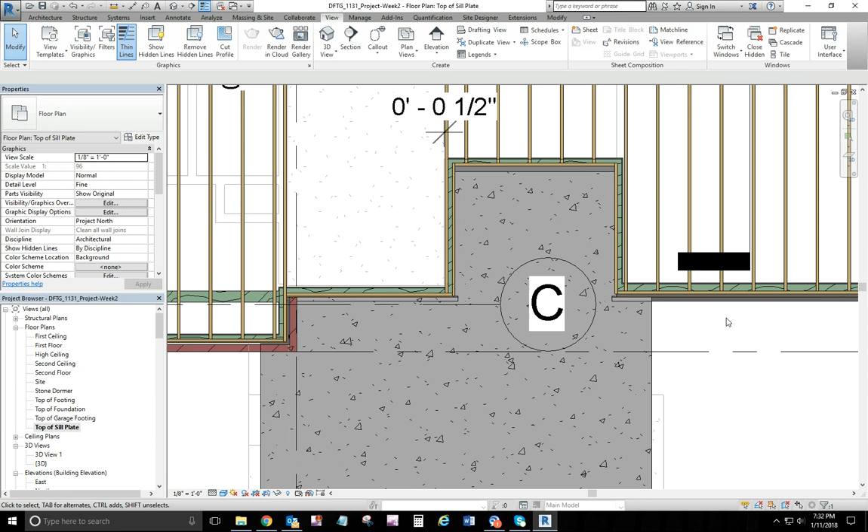So let's fix this problem first. Let's go to a section view through there, and you can see this sill plate. The sill plates are specified as a 3.5 inch sill plate. We actually have 6 inches of space there. So in actuality, they would pull that back in or cut some filler to put in there. But what let's do is let's take this and align it to the outside edge.

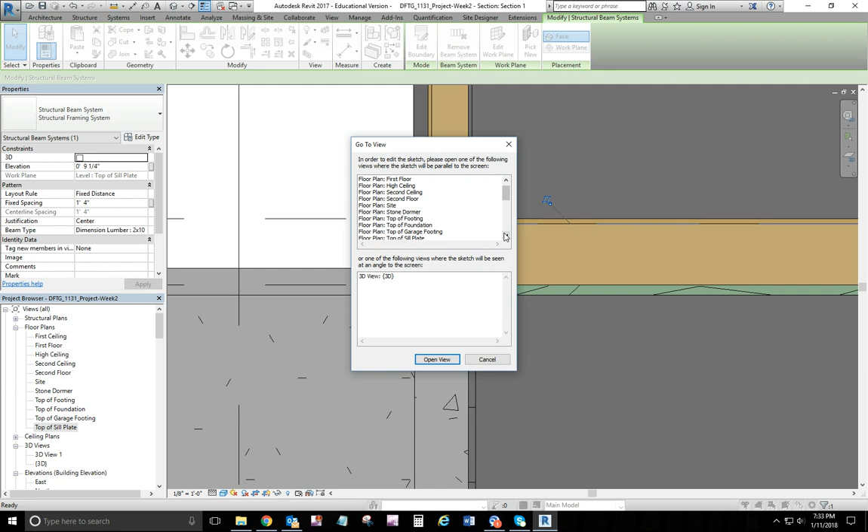And that may... we'll see how that adjusts us. Now we're going to have to go back in and edit our boundary on that, and we did that on the top of sill plate layer. So I want to move that down to... okay, we'll try align.

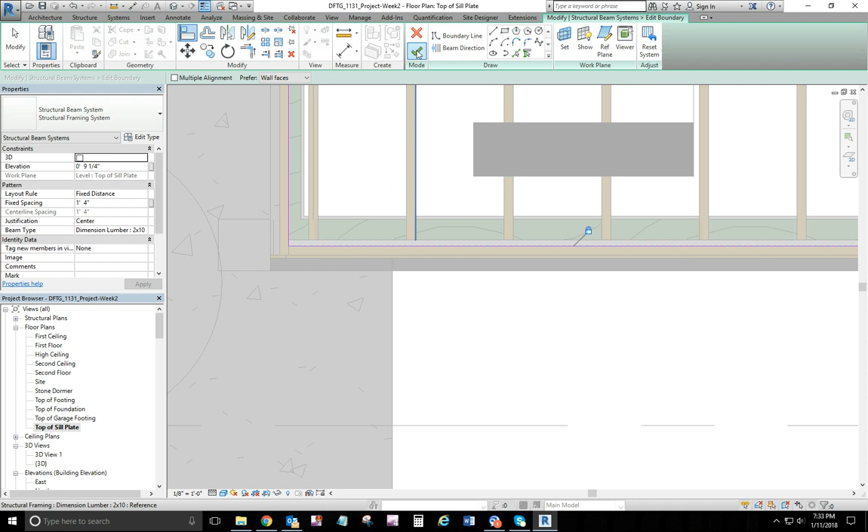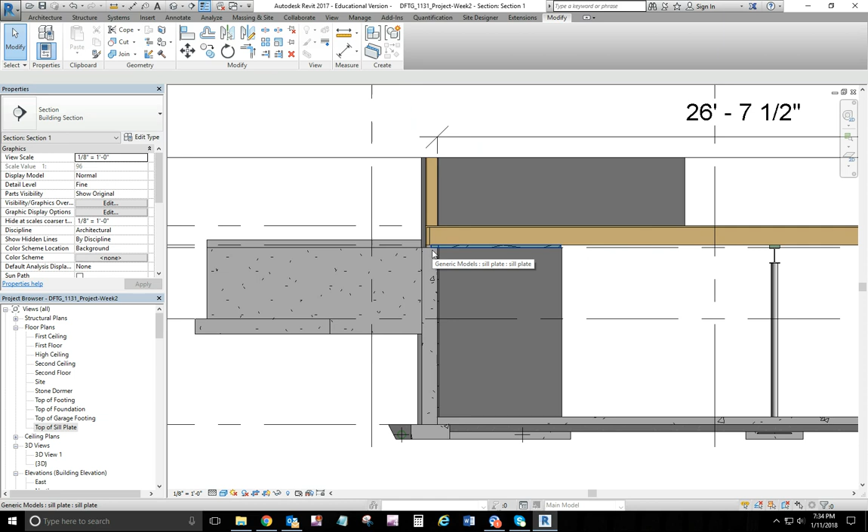Okay, so that fixed that problem, I think. Yeah, okay, so that fixed that. Our subfloor was correct to start with because it went out to the wall itself. It's just one of those weird details that when you're recreating somebody else's project, you're going to run into things like this that you don't quite fully understand. So in actuality, that would be a larger sill plate. Okay, I've double checked these dimensions, and dimension wise, everything's okay.

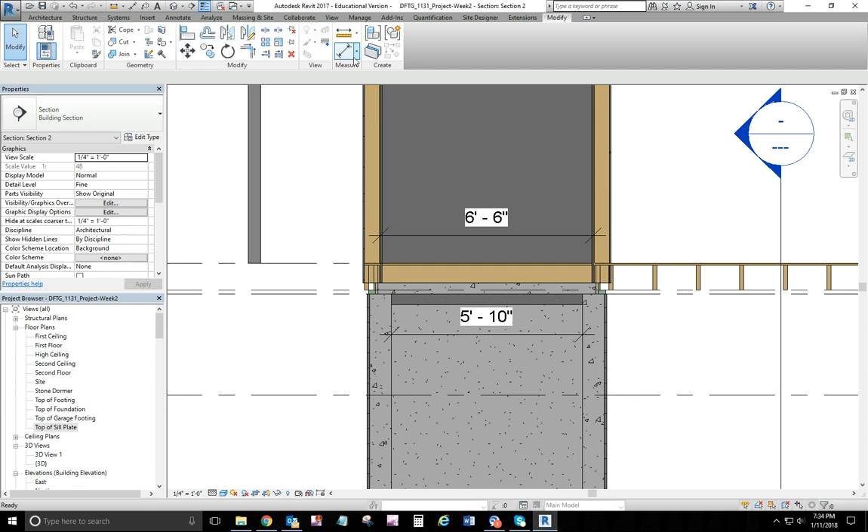All right, so let's go look at the entryway floor because that bothers me also. We got this concrete slab that's supposed to bear on these walls, but then we've got these walls that don't match up and don't sit on anything. So I think the plan calls for a 4-inch bearing slab.

But if you remember on those two, the left and the right wall, the hidden line is not in the center of the wall. It's kind of offset. So I said, let's do 6 inches. Well, I think if we do 4 inches, that will work out. So let's go back to first floor and edit the boundary of that one.

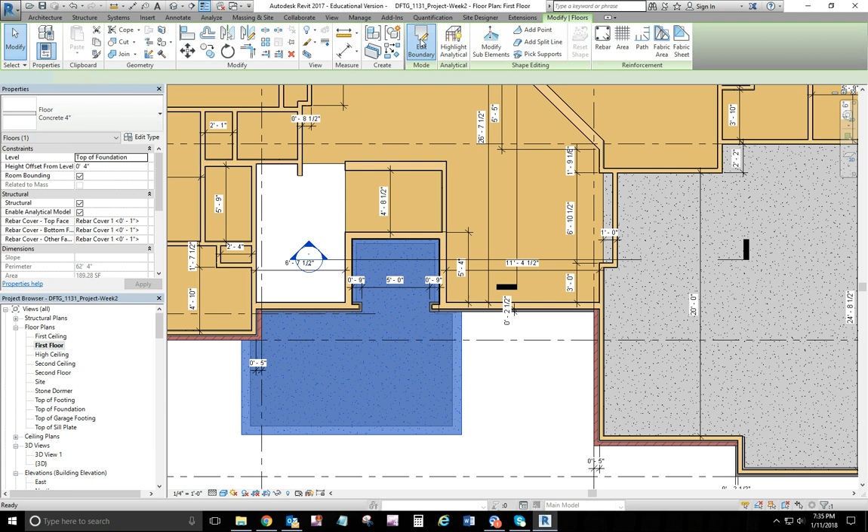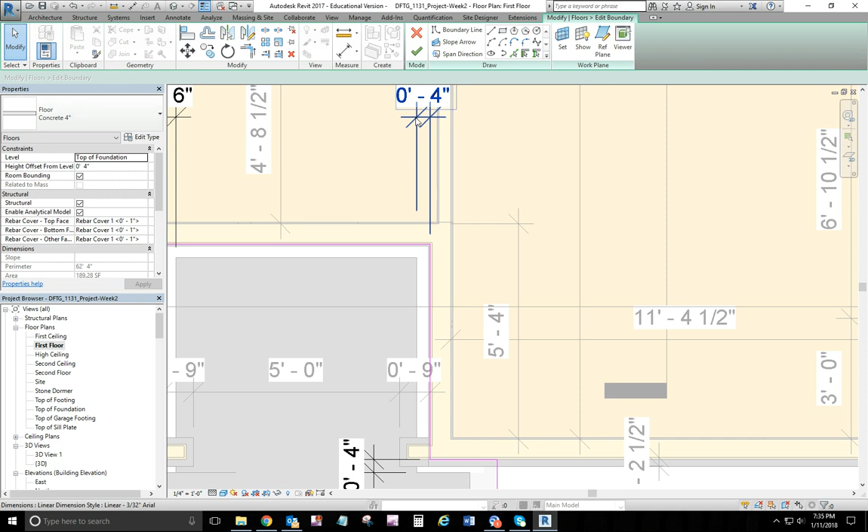It's locked. Okay, unlock it. So that lines it up more so with the walls. Okay, and so that looks so much better.

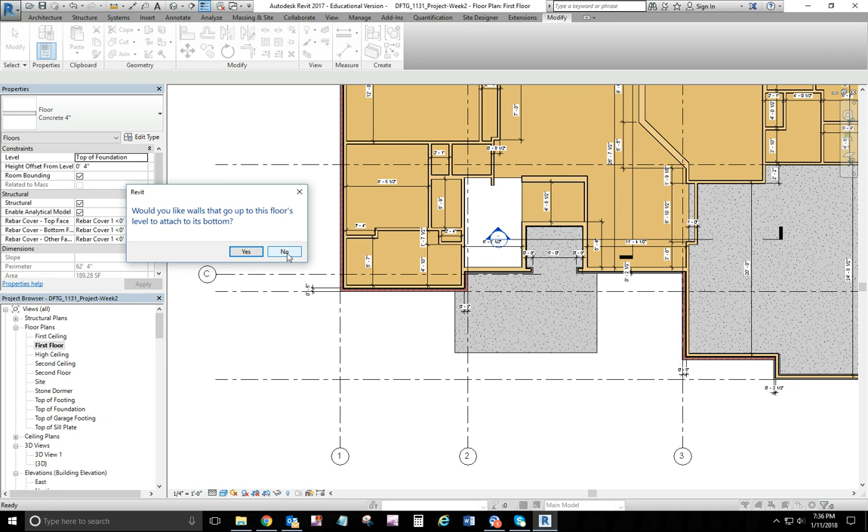All right, so let's finish that. Would you like to attach this floor level? I'm gonna say no because I wasn't real sure what it was talking about. So let's go back and look at our section.

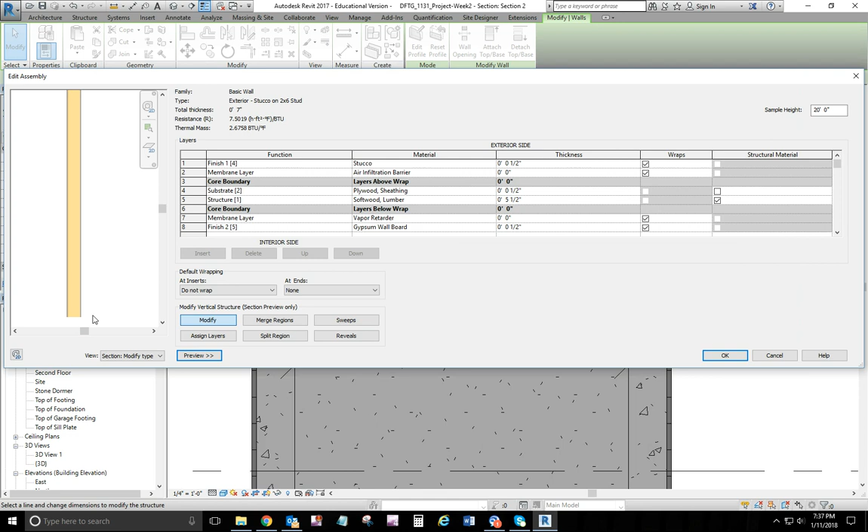Okay, and then these walls will... let's say 0. Oh, we got to have that double winky thingy. So I got to edit the type, remember? Come on here. Okay.

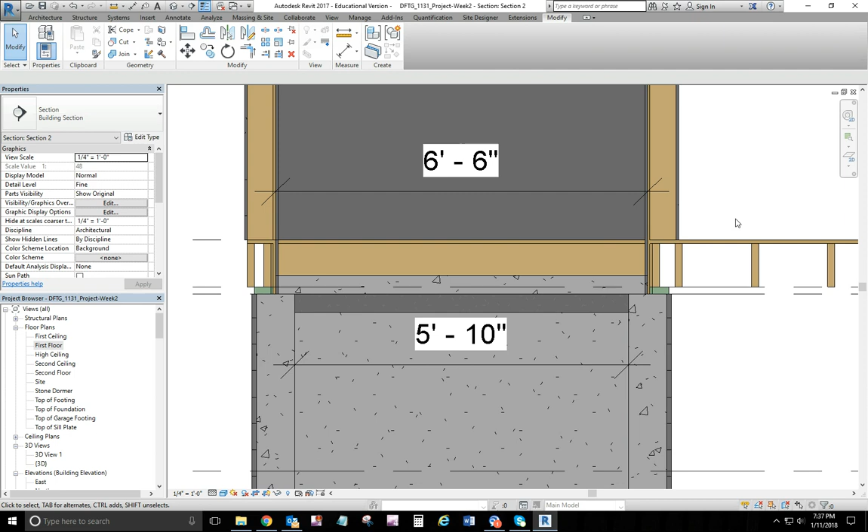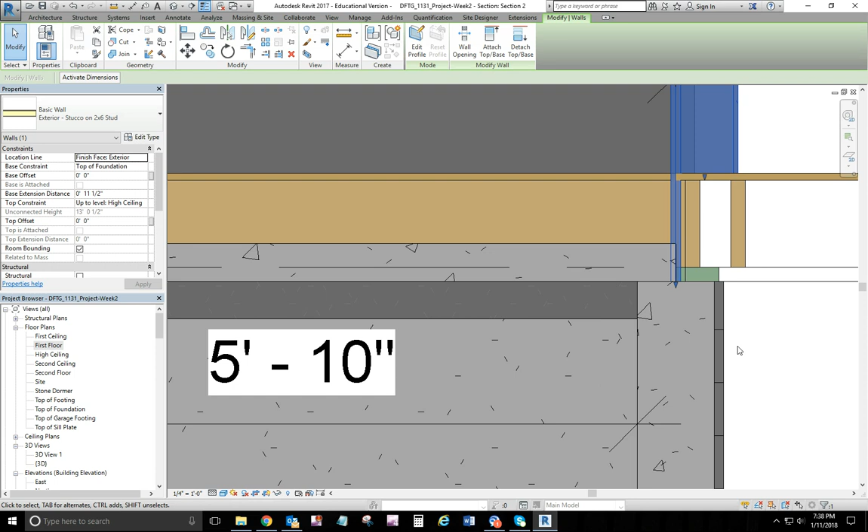All right, I think that looks good because we got sheathing coming down and stucco coming down. We'll have to go back in and edit that again because the stucco needs to come up. Yeah, so we'll do that. We'll edit the stucco again.

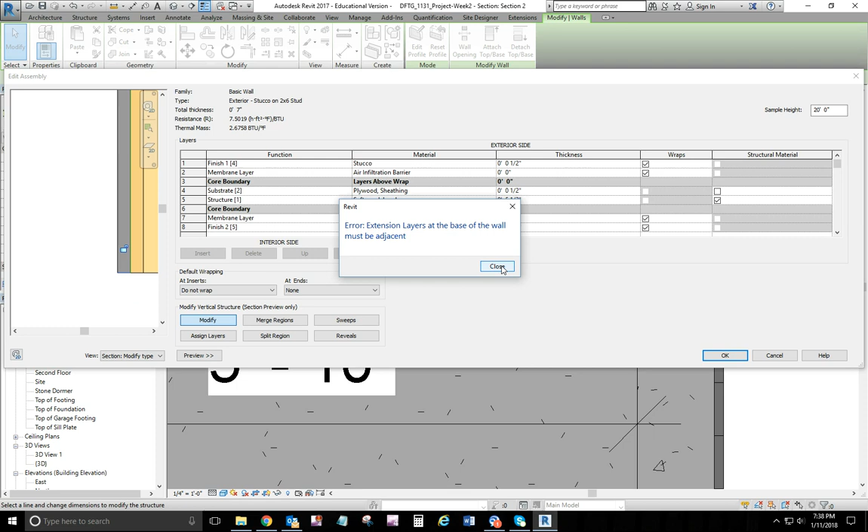Kind of a weird way to go around doing this. Extension layers at the base of the wall must be adjacent. What? Okay, maybe we won't then. Maybe I hit something wrong. Okay, so we'll see about that.

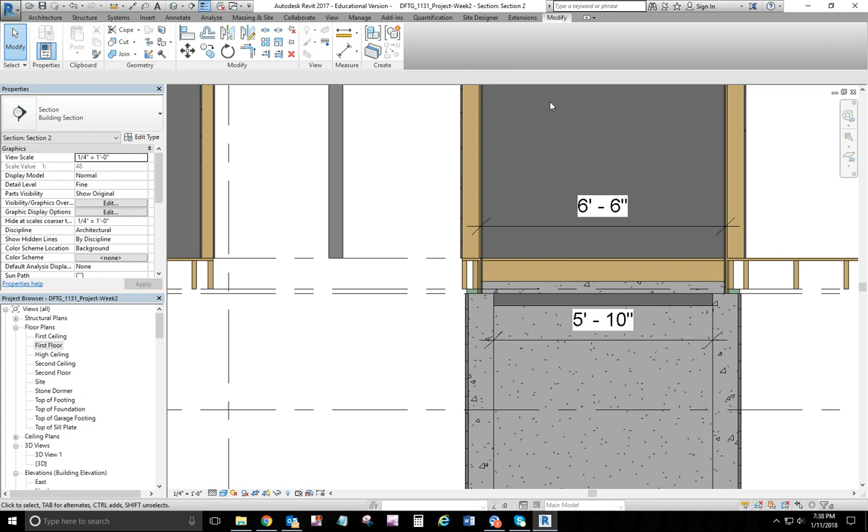And I guess I need to do that back wall back there too. Also, what we want to do here, let me just go back to the first floor, is we want to go ahead and put these little columns in that are on the terrace, front and back. And the ones at the front get concrete block with lightweight stone.

The ones at the rear are wrapped in brick. And the ones at the rear, we don't really have a size for them, but they look to be about the same as the ones in the front. But you want to make your block wall 36 inches tall, and then you'll get a cap on it. And it'll be real similar to this wall right here, which was stone on 4-inch CMU.

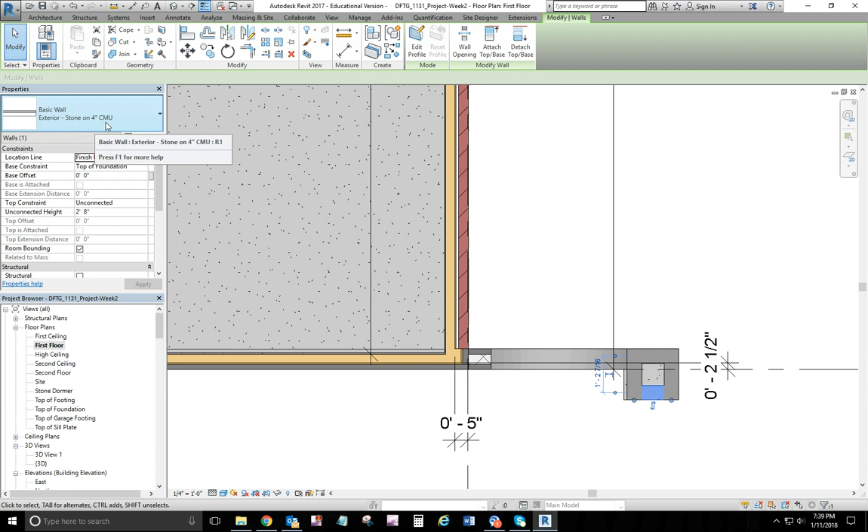Okay, so I think you can probably do those three here and then duplicate that wall and add a brick facade to it, brick veneer. And there's two back here that'll be the same height. I think you can probably figure out how to do those okay.